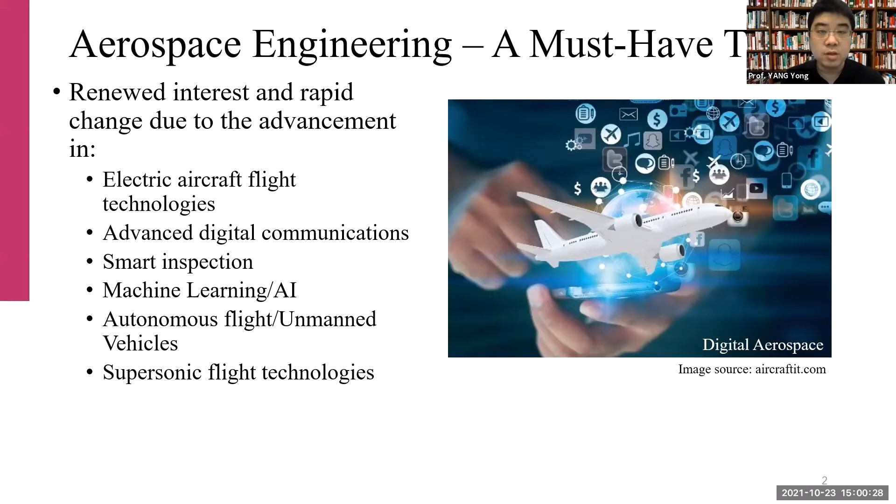There's also a strong demand for aerospace engineering students in different industries in Hong Kong. That includes aviation and air transportation. Hong Kong, as the aviation hub, definitely has strong demand for manpower in aviation and air transportation. It also includes electric vehicles and aircraft, automation and robots, smart manufacturing, digital communication technologies, artificial intelligence, and so on. This is the technology that will need people from aerospace engineering.

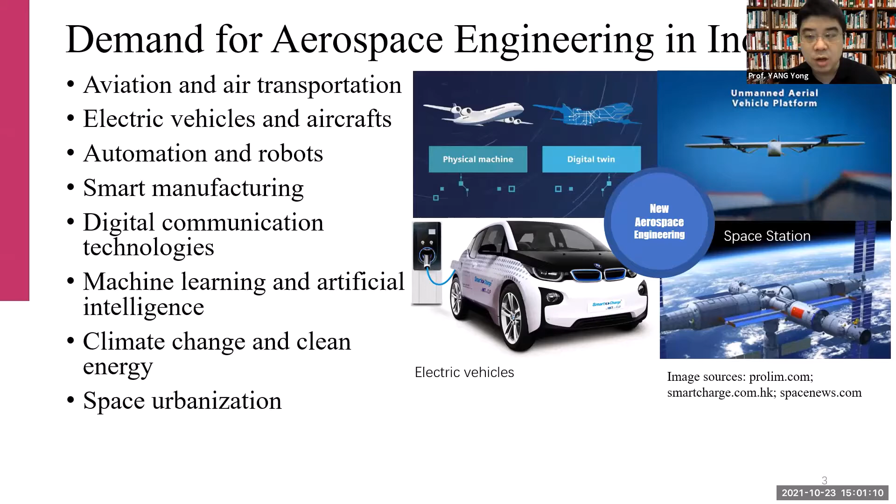According to documents released by the Hong Kong government, the launch of this aerospace engineering program also meets the priority and growth areas in Hong Kong.

Now, the first question we're asked is, do we have any jobs for aerospace graduates? The answer is yes, we do have quite a lot of job opportunities for students graduating from this aerospace engineering program.

Now, in terms of market, we can have four-level markets. We have a local market, meaning students can easily find jobs in Hong Kong. So if people want to find jobs in Hong Kong, there are different typical industries, including technical services, consultants, education, commerce, business, and finance. I should emphasize that students graduating from aerospace engineering can also find jobs in financial engineering. I'll tell you why later on.

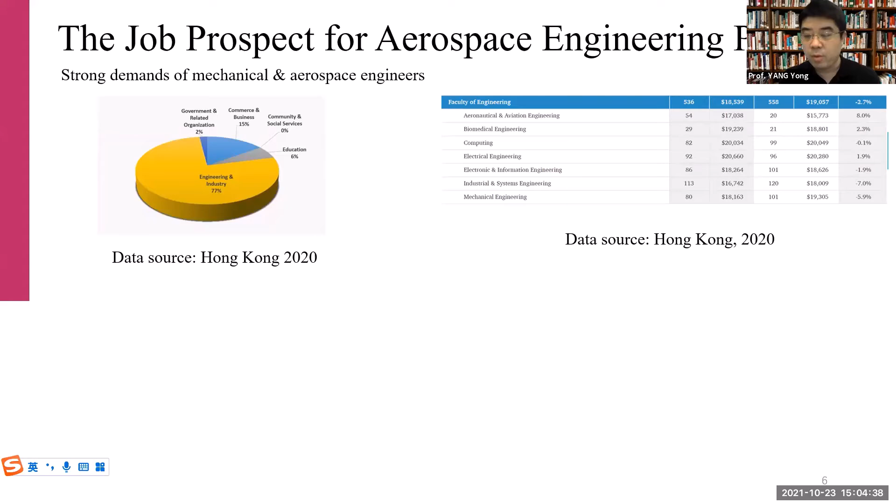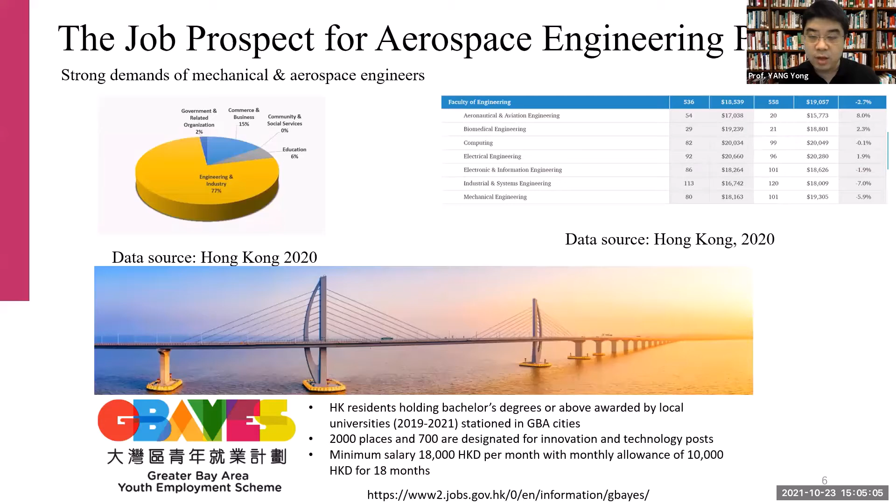Aside from Hong Kong, the Hong Kong government also launched a new scheme called the Greater Bay Area Youth Employment Scheme. According to this scheme, the minimum salary for young people in Hong Kong to get a job in the Greater Bay Area is about 18,000 Hong Kong dollars. That's the minimum salary - as long as you can find jobs in the Greater Bay Area, the minimum salary will be 18,000 Hong Kong dollars. According to news from the government, in April this year, 2021, 2,000 jobs have been offered through the Greater Bay Area Youth Employment Scheme.

Out of these 2,000 jobs, 700 jobs are for innovation and technology posts. As long as you get a degree from engineering related fields, you can easily find jobs out of the scheme. The scheme is very popular, on average 3 applicants for 1 job opening.

The GDP of the Greater Bay Area city is about $1.7 trillion US dollars for the time being, and is expected to keep growing in the years to come. This means young people will have a bright future to find high-paid jobs, not only in Hong Kong, but also in the cities close to Hong Kong within the Greater Bay Area.

The aerospace engineering program offered by CityU is very different from the aerospace engineering programs offered by other universities in Hong Kong. We have a 2-stream curriculum structure, meaning that once they register in this program, they can choose one of the streams to focus on.

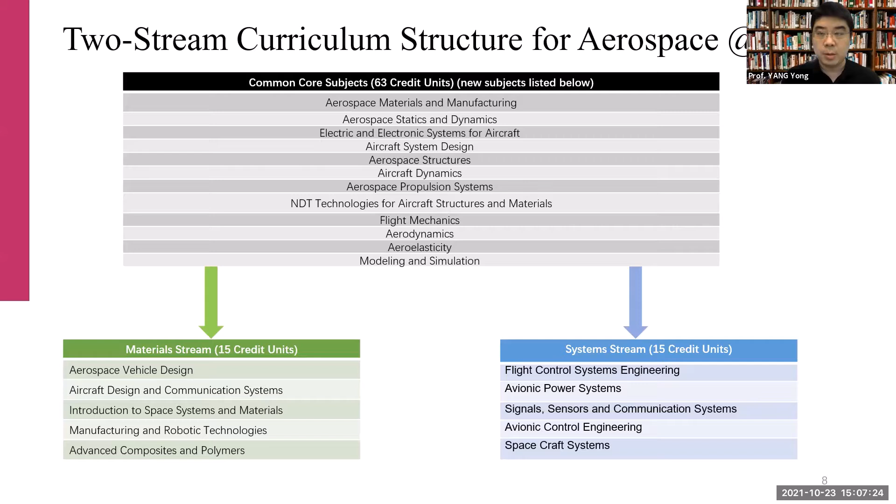In general, aerospace engineering is a platform. Unlike mechanical engineering or chemical engineering which are very focused areas, aerospace is a multidisciplinary engineering program, meaning it's an integration of several programs together. It's an application-oriented program that involves several important fields.

Some fields include fluid mechanics, flight control, propulsion, thermodynamics, and structural solid mechanics. These are typical areas in mechanical engineering, but it also involves AI, artificial intelligence, and smart manufacturing, which are also part of mechanical engineering and system engineering.

It also involves energy and systems, because once you design the aircraft, you have to design the system that provides energy to that aircraft. So students have to study energy and systems, a multidisciplinary area with the School of Energy and Environment at CityU. We're going to work with SEE people to offer the courses related to energy systems.

When it comes to designing and analyzing communication systems, we're going to work with the EE people to offer the courses. And undoubtedly, when it comes to manufacturing aircraft, you have to understand materials - metals, polymers, and ceramics - so that's the area we'll work with material science engineering people. In general, aerospace engineering is a platform for integrated education.

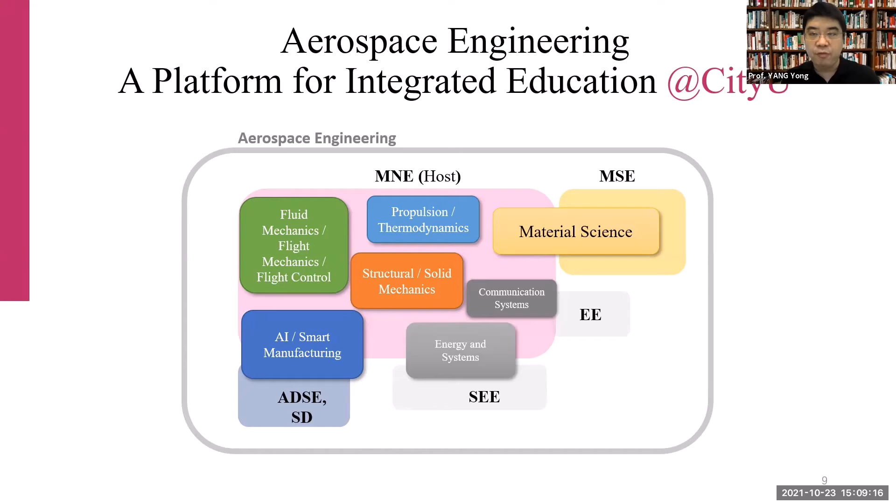I will show some examples of the labs, and also what a student can do after finishing studying aerospace.

When it comes to aerospace, first the aerodynamic design of aircraft and vehicles - we're going to develop facilities and labs for students to study, like the water tunnel and wind tunnel. When students enter this program, they will study how to design the shape of aircrafts or vehicles to minimize friction coming from air or water. That's part of the course we're going to offer students.

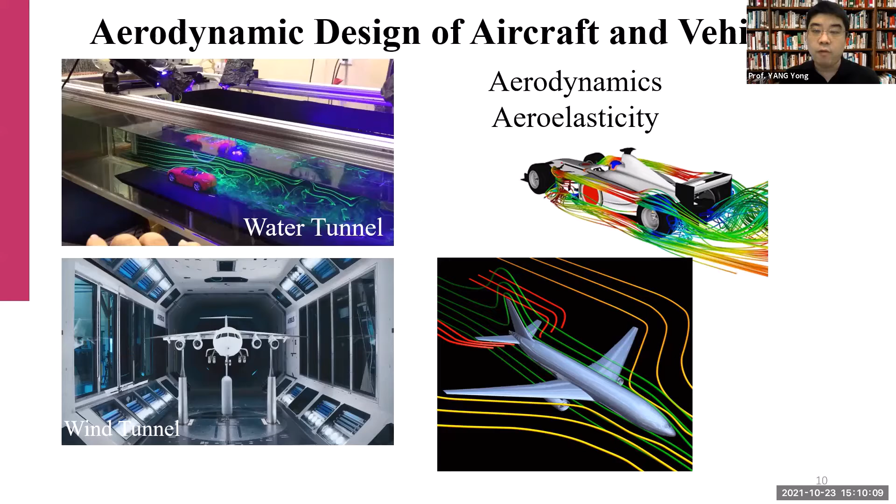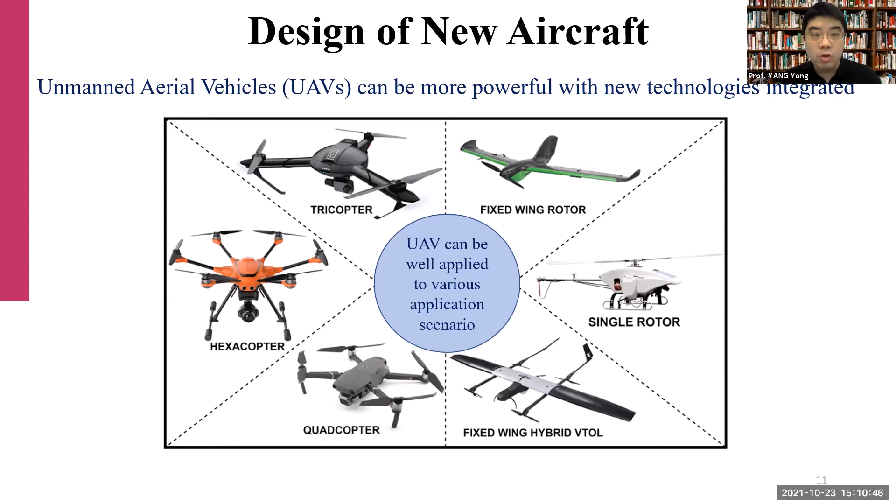We're quite familiar with UAVs now - unmanned aerial vehicles. People can easily fly these UAVs, but how do you design them, and how can we improve the design of UAVs? That's an area belonging to aerospace engineering, so we have hired people with expertise in UAVs. When students get into the program, they have opportunities to improve the design of current UAVs to make better ones. That's also important - design.

Design of new spacecrafts is a more advanced topic. We don't design spacecraft ourselves - mainland China's government has invested quite a lot of resources into spacecraft design. We don't fly spacecraft into outer space, but we can design parts of it, like the control systems or the anti-vibrating systems, so people can put our designs into the aircraft.

This is part of the research we're doing, and one of the faculty members in our department has dedicated their research to micro vibration control systems. Once people complete this kind of design, it's useful not just for spacecraft but also for other applications.

In Hong Kong we have a lot of construction industries. When construction workers work on sites, they need vibration control to minimize the impact - when they drill a hole into the ground, there's vibration coming out. We can use the same design to minimize these vibrations, so it's very useful for the construction industries in Hong Kong.

So aerospace is not just focused on spacecraft - it also applies to airplanes and electric cars. The technology we learn can also apply to other fields as well.

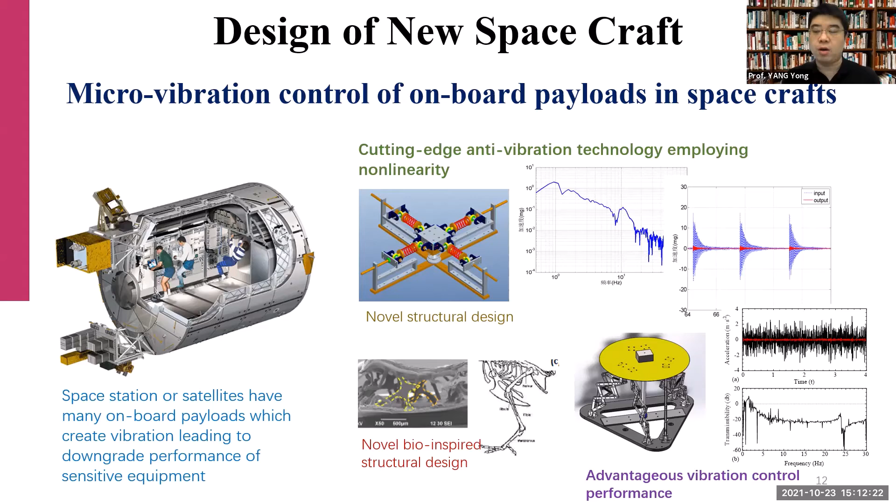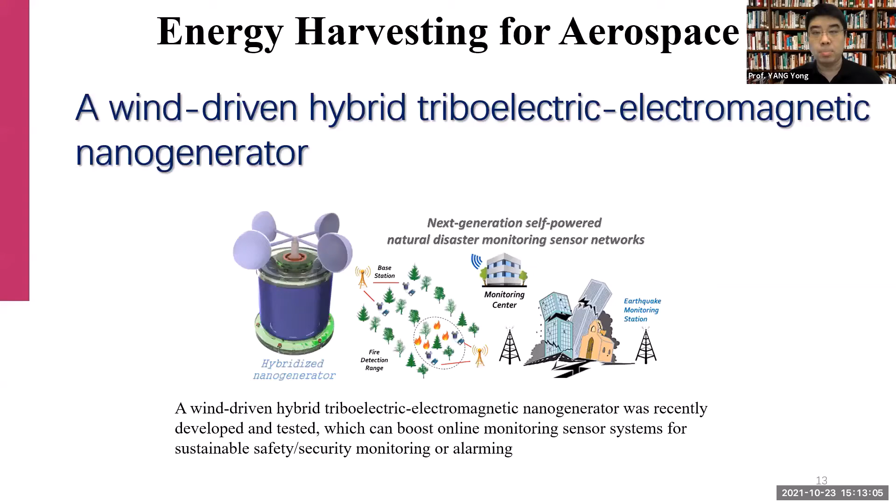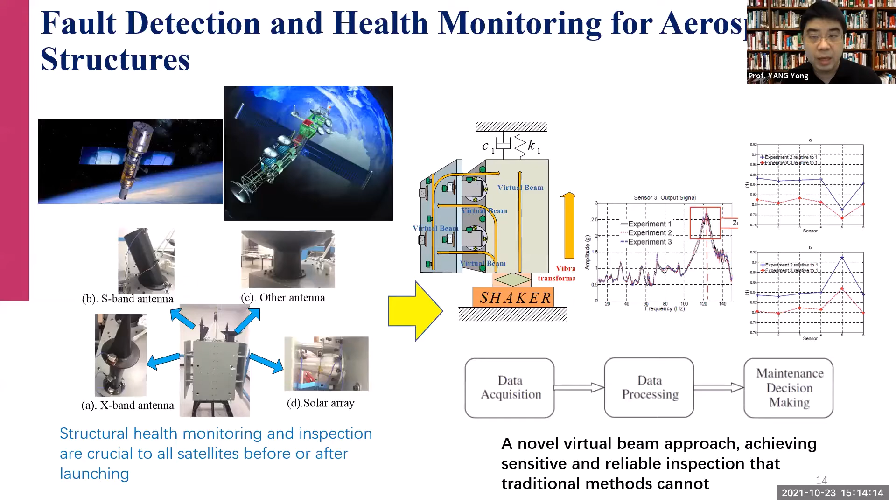This is also part of the programs we're going to cover with the courses we designed. The same technology can be applied to airplanes, and also to other vehicles, cars, bridges, and high-rise buildings. You can see how useful this technology will be in general for different engineering fields.

With the technology we learned, we use sensors for detection and health monitoring, and we can also design robots using the know-how we learned from aerospace engineering, to create robots for underwater sensing and monitoring. Now I'm going to show you.

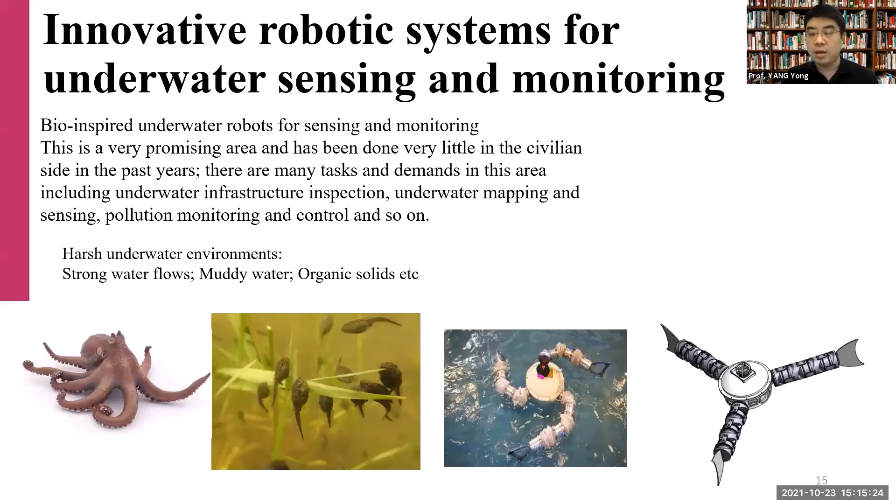All this technology actually comes from aerospace engineering. That's the design of robots by people at CityU.

But when you design robots, you want to actually make them - how can you make these robots, how can you make the structures? At CityU for aerospace engineering, we offer courses related to 3D printing.

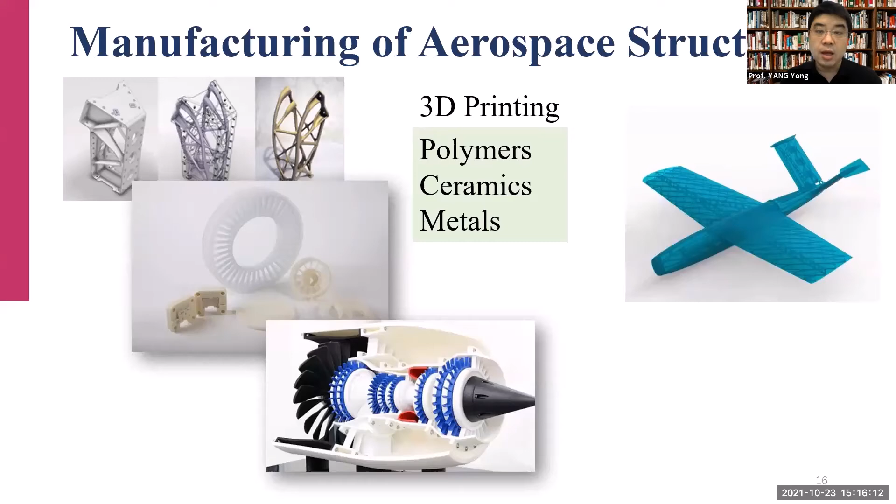We developed a 3D printing laboratory for students to do labs. With the 3D printing technologies developed at CityU, students are able to print structures using different kinds of materials, including polymers, ceramics, and even metals. We're going to invest quite a lot of money in developing 3D printing facilities at CityU - that's quite unique.

Now this is about printing the structures. When it comes to development, you have to choose the materials, right? So what kind of material are you going to choose to do 3D printing? That's why we offer courses related to material selection.

Students must understand how to select the right materials to print. In aerospace engineering, alloys are very important materials. We have high temperature alloys to make aircraft engines. You can use lightweight alloys to make the outside structures, like part of the fuselage of the airplanes. That's also included in the training of students.

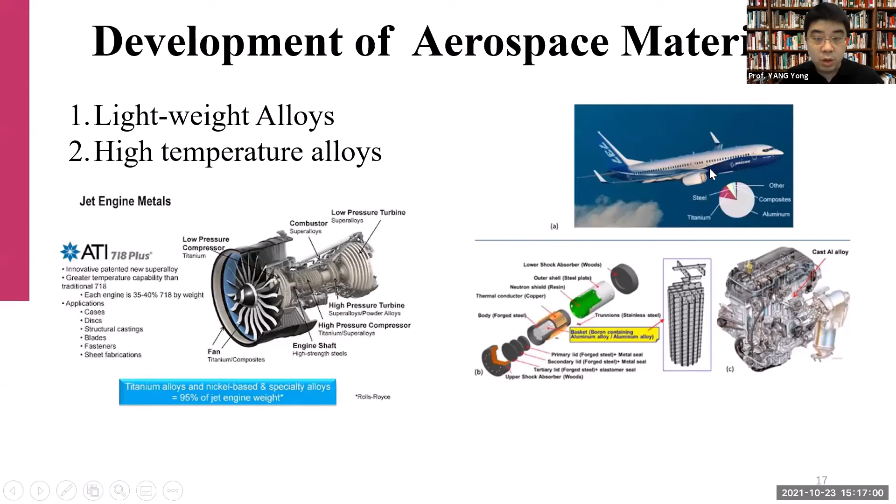Aside from metals, we also focus on composites. Today when people design airplanes, they use composites quite often. We have faculty members dedicated to research on composite materials. One of the courses designed by us is composite design. After studying the course, students will know the principles of designing composites, and they can also make composites themselves.

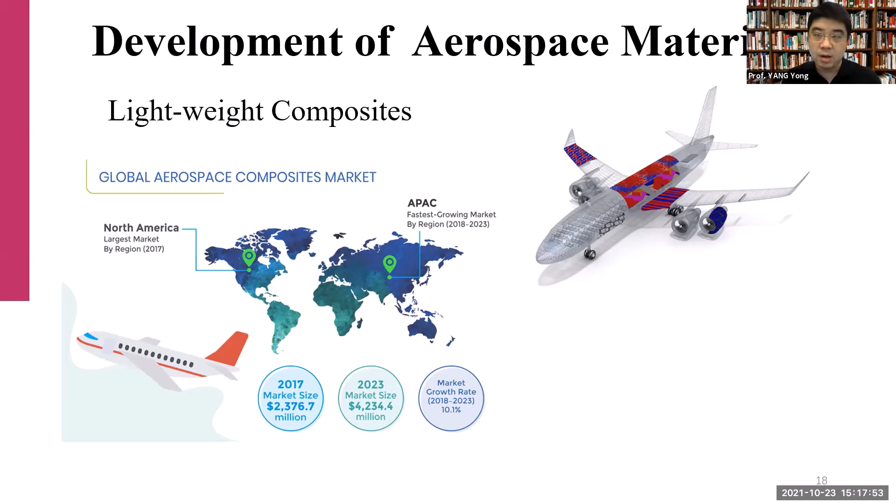We just hired one young faculty member from the US, from a university in Michigan, I think. His focus, his dedication, is on composites. He will teach one of the courses, teaching students how to make composites and how to test composites. That's very useful.

When it comes to safety and risk, it's quite critical. Today, when we take a flight, we make sure the flight is safe. This involves a lot of use of data. When airplanes are in the sky, they keep communicating with stations on the ground, so there's exchange of data between the airplane and the airports. People need to process this data through big data analysis.

This situation is quite similar to the fluctuations you could see in the stock market. You can definitely see fluctuation in the price of stocks, and they are comparable because they both involve data analysis.

So that's why in the US and also in the UK, a lot of graduates from aerospace engineering get hired by financial engineering, by financial sectors, to do data analysis, data monitoring, and data modeling. Because in general, aerospace engineering is a mathematically intensive program, it's very useful not only for classical engineering but also for financial engineering. That's very important, and I want to draw attention to this.

So with this, I will briefly wrap up what we are going to offer and what students will study after taking the aerospace engineering program. In the following, if you have any questions, we'll answer them.

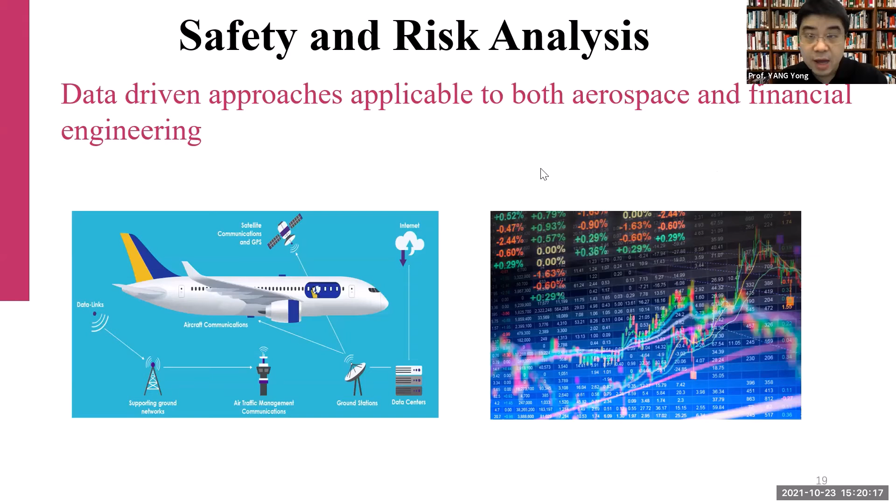Requirements: the general requirement for aerospace engineering is the same as mechanical engineering. I think we simply list the general requirements on the website, so let me share that with you. Just wait a minute.

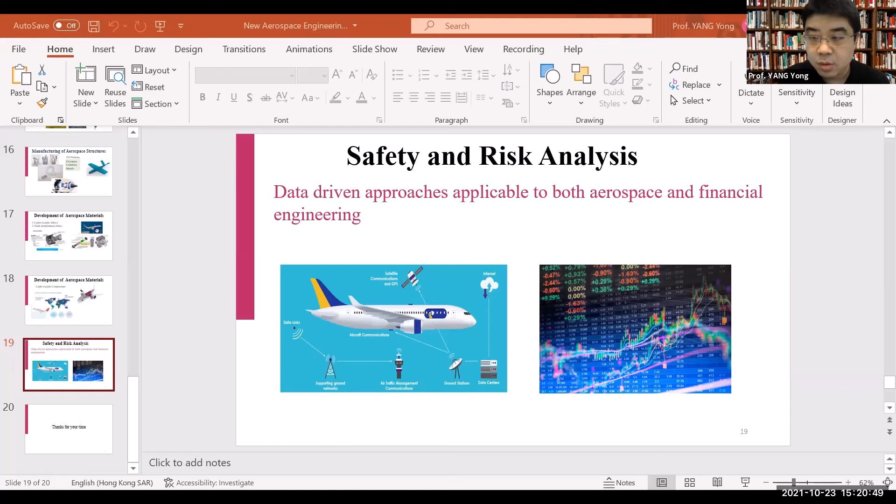If you go to the website of CityU, the Mechanical Engineering Department website, and go to the programs, we have three programs, and this is the aerospace engineering program. It's listed with a basic description of the major objectives, career prospects, and entrance requirements. I think that's the concern of most parents, right? What's the basic requirement for aerospace engineering? From the website, you can definitely see clearly what requirements we have if you want to register in this program.

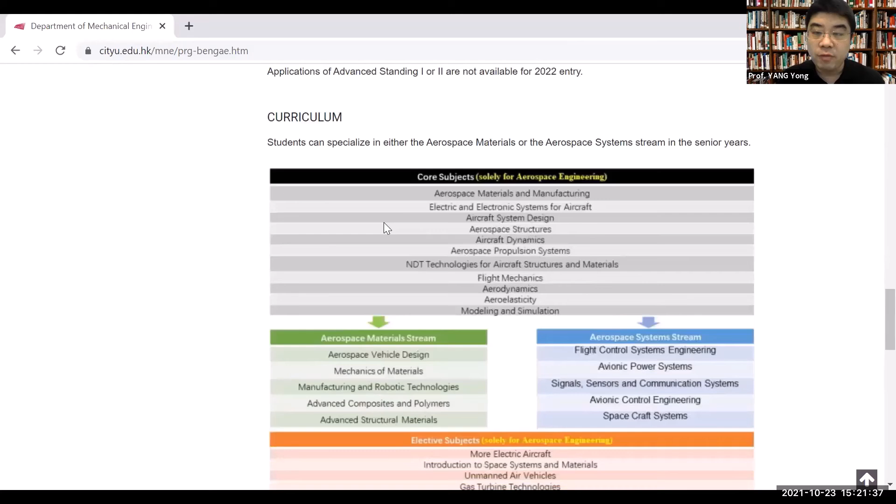Okay, that's the curriculum. This is the curriculum structure for aerospace engineering. When it comes to professional recognition, this core program is going to be accredited by Hong Kong IE. By the way, this is a government-funded program, so the tuition fees will be the same as other tuition fees for other programs.